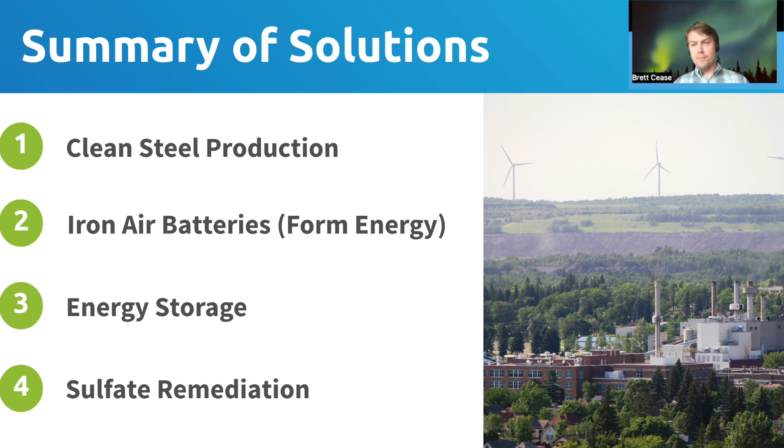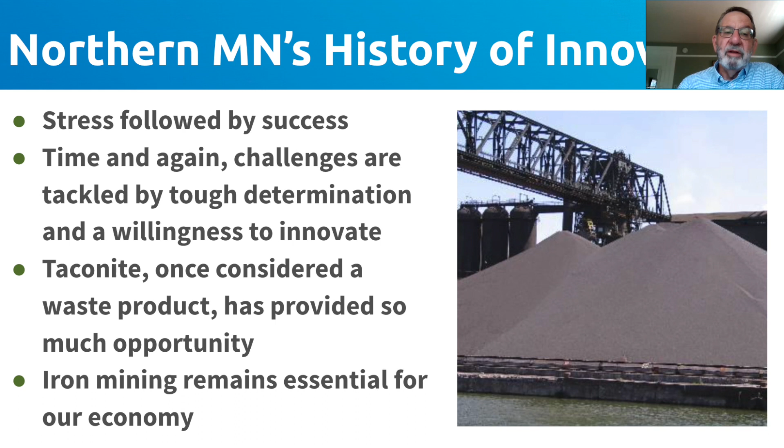The history of northern Minnesota is often told as a story of boom followed by bust. But perhaps a better description is stress followed by success. In particular, mining on the Iron Range is a story of stressful turning points, followed by successful adaptation. Challenges were tackled with tough determination and a willingness to innovate. By the end of World War II, high-grade iron ore was becoming harder to find. At that time, taconite was considered waste, at least until E.W. Davis figured out a way to concentrate and pelletize it. The rest is history. The iron mining and steel industry, so important to our regional economy, now face another turning point: the drive to decarbonize the iron to steelmaking process in response to climate change.

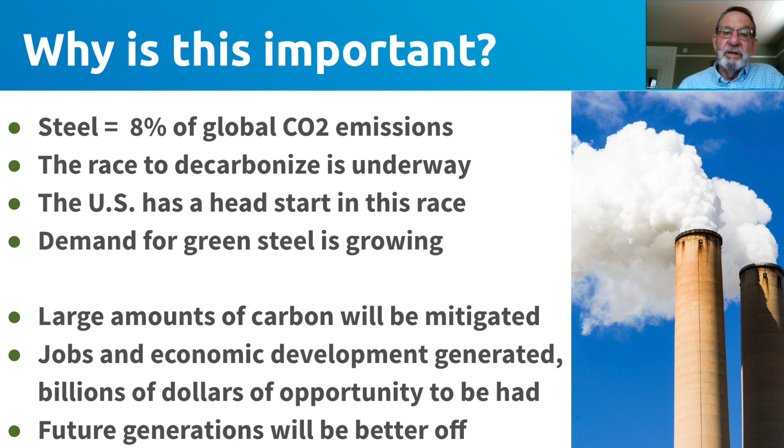Steelmaking accounts for approximately 8% of worldwide carbon emissions. Mitigating these emissions would be a very significant step in combating climate change. Moreover, the necessary transition away from fossil fuels to a clean energy economy will require more, not less steel. But what kind of steel? Major steel users, the auto industry for one, are asking for low carbon intensity steel. In other words, green steel.

The transition to green steel and a clean energy economy provides not only challenges, but great opportunities as well. In this transition, trillions of dollars will be invested and millions of good jobs created. This can be a win-win-win: lower carbon emissions, economic and job growth, and preserving our northern Minnesota way of life for our children and grandchildren.

The question is, so why not here in northern Minnesota? How can we take advantage of our many assets? Access to natural resources, a skilled workforce, available renewable energy, and strategic positions on the electric transmission and transportation grids. More specifically, what are the ingredients necessary for our region to be a player in the making of green steel?

First, to make green steel, we need to find innovative ways to decarbonize ore processing and steelmaking. Second, we need access to clean, renewable energy: wind, solar, hydro, and hydrogen. Third, we need electric transmission capacity to get the power where it is needed and means of storing power, such as batteries and pumped hydro. Fourth, we need innovative technologies to address problematic byproducts of mining, in particular, ways to mitigate sulfate discharge. For the remainder of this video, let's take a closer look at each of these ingredients.

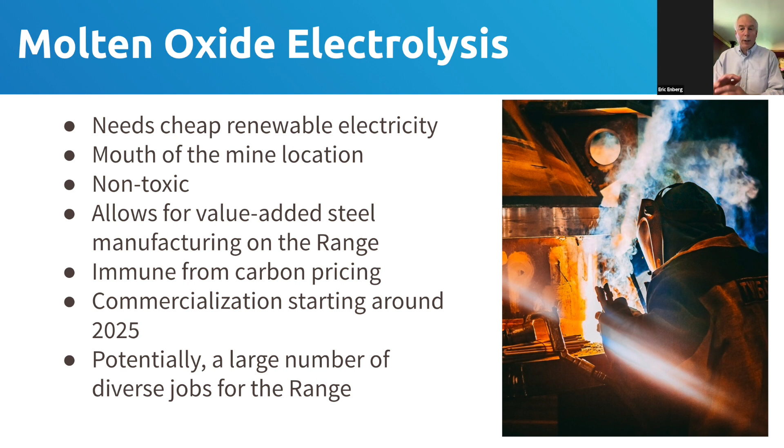That's what makes rust, or iron ore. It needs a lot of cheap renewable electricity. Because it is very modular, it is something that can be done at the mouth of the mine, and it is a non-toxic process—the only thing that comes out of it is oxygen. It allows for value-added steel manufacturing on the Iron Range, and because it can only operate with cheap renewable electricity, it's really immune from carbon pricing. Commercialization of this process is expected around 2025, and potentially a large number of diverse jobs could be coming to the Iron Range, as you're able to produce iron, and if you mix a little bit of carbon into it, you can make steel, which can be used for all kinds of manufacturing jobs on the Iron Range.

Next is low temperature iron. This process uses an acid to liberate the iron from the ore, and then you run electric current through it, and it electroplates the iron out. This then feeds an electric arc furnace, which is how most steel is actually produced in this country using scrap steel, but this source of iron would be ideal for it. Interestingly, you also get other minerals out of this process, such as copper, aluminum, manganese, and silicon. The pilot for this project is expected to be done in Pueblo, Colorado.

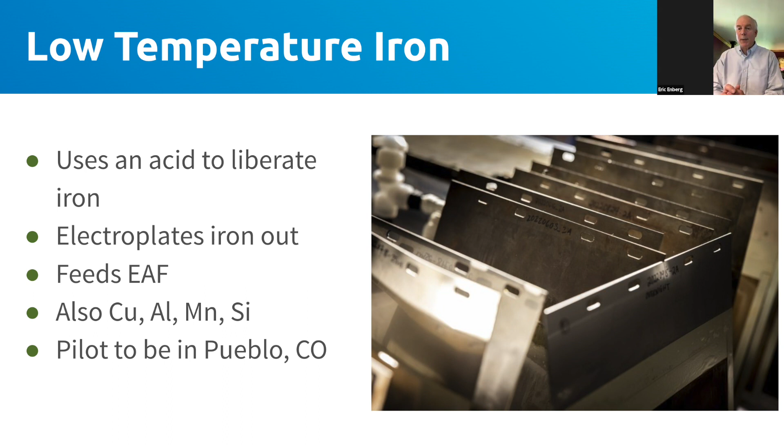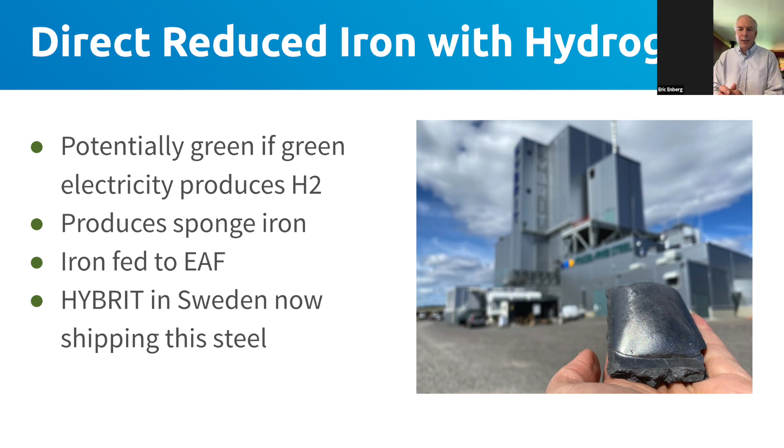Direct reduced iron with hydrogen—this is probably the process that is furthest along. The idea is that green renewable energy would be used to produce hydrogen, and the hydrogen is used to produce the high heat necessary to dissociate the iron from the oxygen and produce iron. This produces sponge iron, which can also be fed into an electric arc furnace. You get the sense that electric arc furnaces have these cosmopolitan tastes when it comes to iron. The HYBRIT system in Sweden is now shipping this steel, so this is actually a commercially viable process.

Thermochemical reduction and oxidation—that's a mouthful of a label for a process that is actually kind of complex. But to boil it down, it uses perovskite crystals to steal oxygen off of carbon dioxide, creating carbon monoxide in the process inside a blast furnace. That carbon monoxide then goes back to the ore and steals another oxygen off of it, creating pure iron. It's half the cost of using coking coal, and you get a 90% carbon dioxide reduction. This one, however, is probably the furthest from commercialization of the things we looked at—it's still on the lab bench. There are a couple of issues they have to resolve.

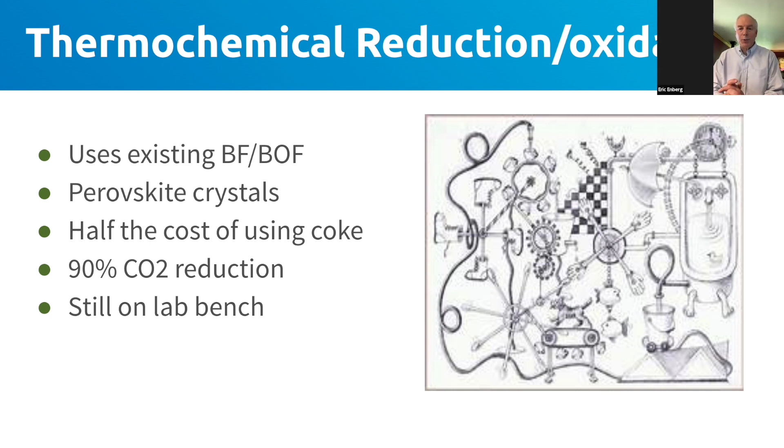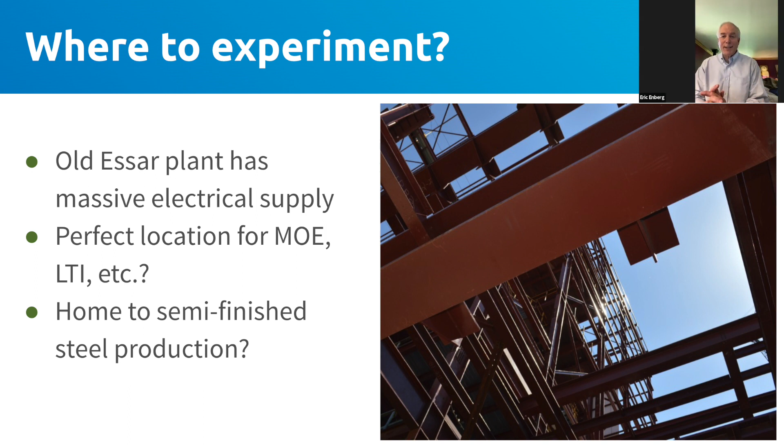So where to experiment? Well, the old Essar plant has a massive electrical supply already attached to it, and it would be a perfect location to do things like molten oxide electrolysis, low temperature iron, etc., and possibly could be home to semi-finished steel production. That's it for me. There's some very exciting things going on out there, and we can all look forward to it. Thank you.

I'm Mike Overend, and I want to talk to you about a new technology that's an important clean energy solution which will change our world. This is the opportunity presented by the Form Energy Iron Air Battery. Manufacturing this battery in Northeast Minnesota is a unique opportunity, offering permanent, strong job growth for iron mining and sustainable, environmentally friendly manufacturing jobs for range communities. These batteries are a critically important climate solution that lower costs for clean energy, and importantly, this technology does not require controversial metal resources or unreliable supply chains.

Our global energy system has a major problem. Burning fossil fuels causes major economic damage and inflation while it destroys our environment and our health. In 2022, over 60% of our global electricity came from burning dirty and expensive fossil fuels, creating a huge source of pollution, waste, and extra expense. These are also a major source of greenhouse gas emissions, which cause severe losses from floods, droughts, fires, disease, famine, and wars. The air pollution from burning fossil fuels like coal and diesel is responsible for about 1 in 5 premature deaths worldwide from chronic respiratory and heart disease, according to Harvard School of Public Health.

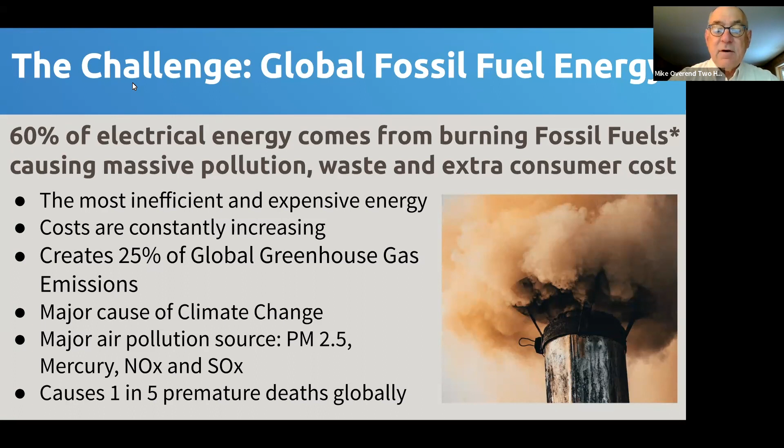The solution is moving to 100% clean, cheap, renewable energy to power all our needs with clean electricity. This is called beneficial electrification, and it eliminates up to 80% of all greenhouse gas emissions. Unfortunately, the sun doesn't always shine and the wind doesn't always blow. Wind and solar are intermittent energy sources, and current utility batteries only last for 4 hours.

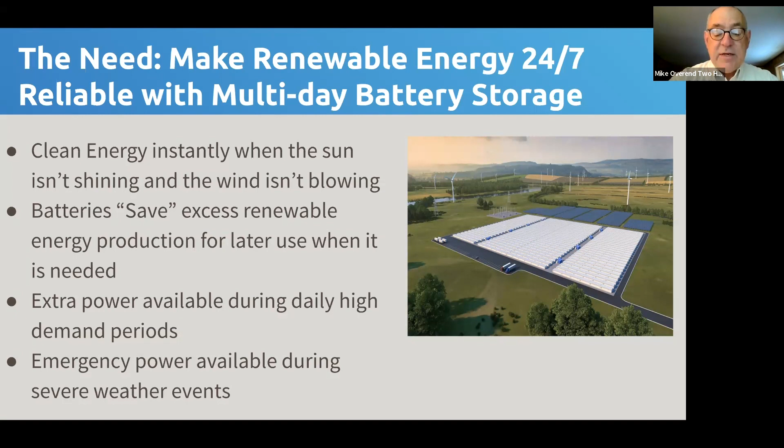For 24/7 reliability of renewable energy, we need a utility scale battery that lasts for multiple days. Form Energy saw this need and created a cost-effective, clean, and scalable solution. Their iron air battery instantly provides up to 100 hours of continuous power, which utilities can use for both routine and emergency energy storage needs.

Form Energy's iron air battery is unique for storing excess wind and solar energy, making it 24/7 reliable. It uses Minnesota's abundant, affordable iron products, with a safe, non-flammable design and recyclable, non-toxic components. It's flexible and modular to meet the energy storage needs of any major utility.

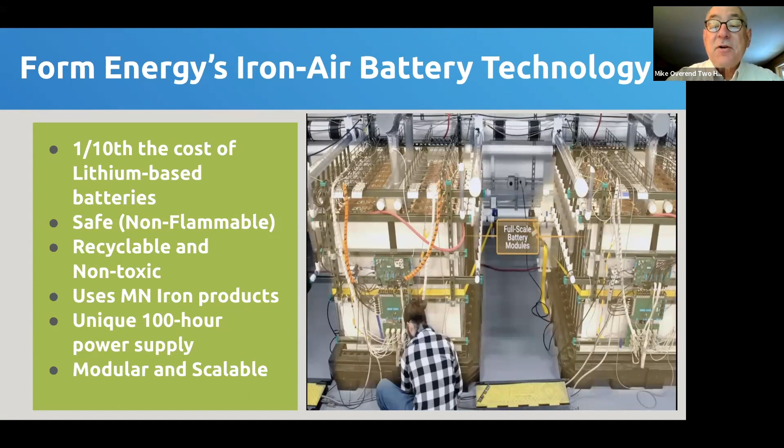The iron air battery uses the common chemical reaction of rusting of iron-based metal using water and oxygen from the air to instantly release stored electricity for up to 100 hours at 1/10 the cost of current lithium-based storage batteries, and the only byproduct is oxygen.

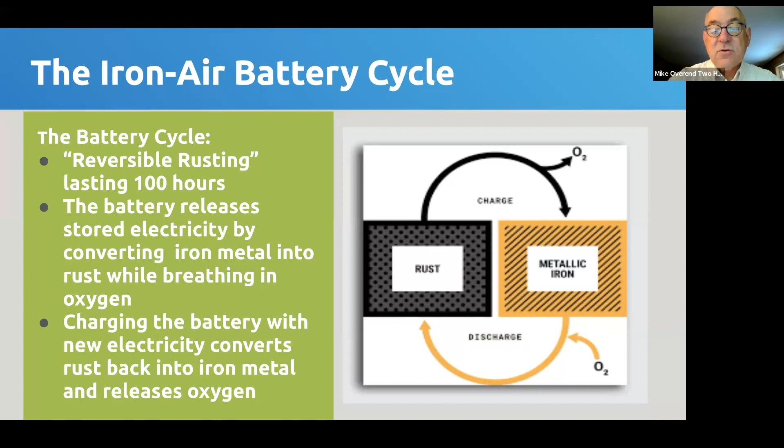Northeast Minnesota has the unique resources which are perfect for Form Energy to manufacture iron air batteries here. We have skilled labor, iron ore, and the potential for DRI pellet production. We have advanced electric grid and transportation infrastructure. Northeast Minnesota is a perfect home to manufacture Form batteries.

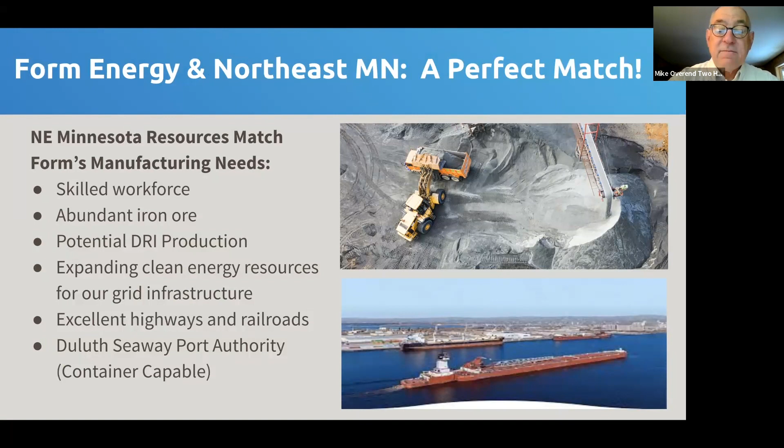Form Energy is building their first manufacturing facility in Weirton, West Virginia, creating 750 new jobs with a $760 million investment. The US is expected to install 75 gigawatts of battery storage by 2027. That's the equivalent of 75 large coal-fired power plants. Form will need to make additional manufacturing facilities happen to meet this demand.

Manufacturing of Form's iron air battery is a unique opportunity for Northeast Minnesota, offering sustainable iron mining jobs, good construction jobs, sustainable battery manufacturing jobs, and it makes green steel and other clean energy manufacturing in Minnesota possible as well.

Our communities and leaders need to help recruit Form Energy manufacturing to Northeast Minnesota. These are mining jobs for people and the environment, which will sustain and unite our range communities.

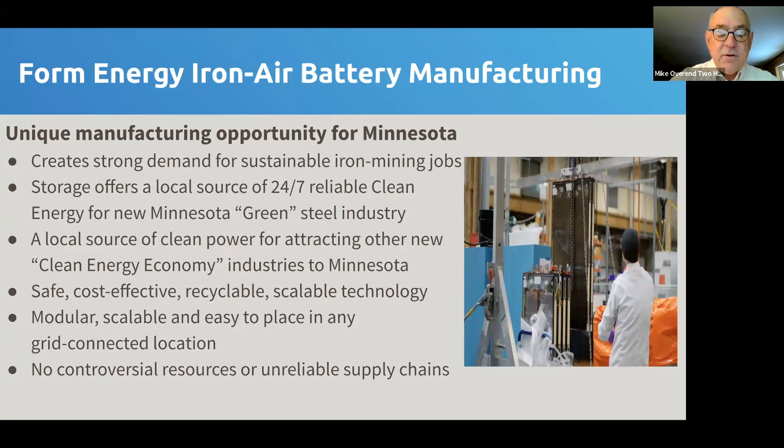Thank you. Hello, my name is Russ Mattson, and today I want to talk about the opportunities for the production, storage, and utilization of green renewable energy in northeastern Minnesota.

The driving force behind this opportunity is the growth in renewables, solar, and wind. Recent data from the Energy Information Administration shows that intermittent wind and solar energy production amounted to almost 14% of energy production. Projections by NREL and others indicate wind and solar will double by 2030, reaching almost 1/3 of the United States energy supply needs.

Because of the intermittent nature of renewables, energy storage is an absolute necessity. Storage will be necessary for load shifting, voltage control, frequency control, peak shaving, deferral of distribution or transmission projects, curtailment which would occur otherwise and seriously impact solar and wind production, as well as other functions.

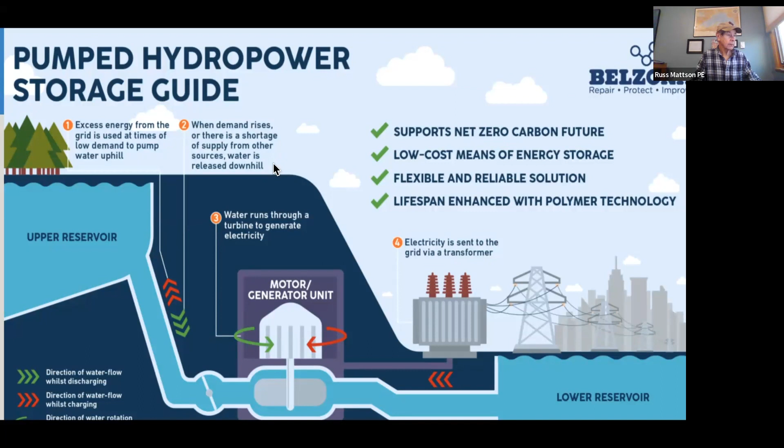There have been recent studies done by the University of Minnesota via the NRRI looking at the feasibility of pumped hydro in northeastern Minnesota at abandoned mine sites. 9 such sites have been identified for further study.

There are other energy storage technologies that have been studied by the University of Minnesota. One such technology is compressed air energy storage. Air is compressed and stored underground and returned to the surface when needed to drive a turbine. There are 2 large such facilities in the United States today, one in California and the other in Alabama.

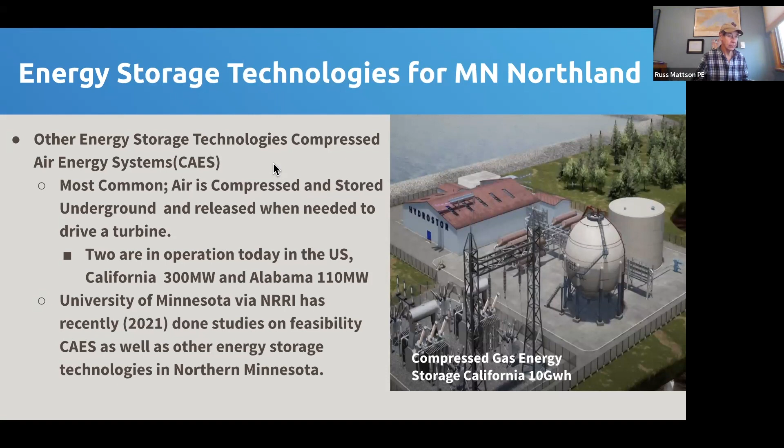There are other storage technologies as well that are suitable in the northeast of Minnesota. I won't go into them in detail, but they include gravity storage, where weights are simply lifted to height above grade and released, driving a turbine when needed.

Northeastern Minnesota is in a very unique position. All the pieces are in place to utilize and store green renewable energy. We have the transmission infrastructure. We have two 500 kV lines with quite a bit of capacity.

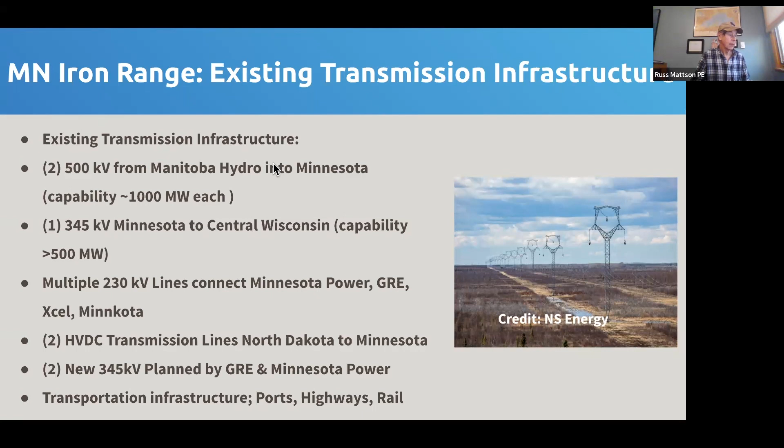We have an existing 345 line into central Wisconsin, and multiple 230 kV lines, and HVDC transmission service goes to all the mines today in Minnesota. We have the geology, abandoned mine sites, and water for closed loop or open loop pumped hydro. In addition to the transmission structure and the geology, we have the transportation infrastructure, ports, highways, and rail from legacy industries. And if that wasn't enough, we also have more green potential. Manitoba Hydro indicates they have the potential of an additional 4,300 megawatts of hydro at existing facilities. Thank you very much.

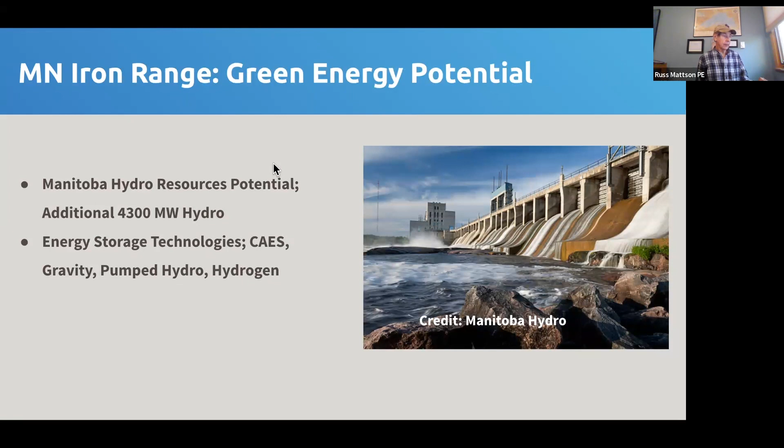Hello, I'm Jeff Hanson from Clearwater BioLogic in Babbitt, Minnesota.

In Minnesota, we do have sulfate standards because sulfate does impact wild rice and the health of our water systems. This sulfate often comes from mining features from taconite mining. In the 2018 Tribal Wild Rice Task Force report, they identified, using MPCA and DNR data, the point sources of sulfate on the Mesabi Iron Range. The larger yellow dots show higher concentrations of sulfate in the streams.

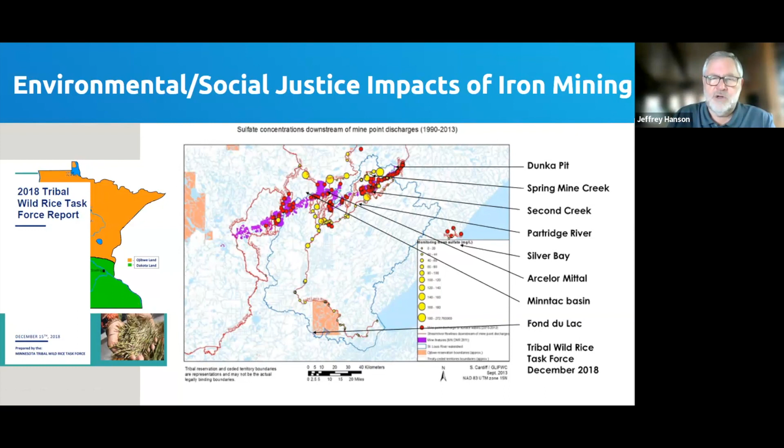The blue line is the St. Louis River watershed. We can see that many of these point sources feed into the St. Louis River. As it goes downstream, it gets more diluted, and there is a natural attenuation of sulfate as it goes. This natural attenuation has sulfate that permeates into the anoxic soil where there's no oxygen.

So the sulfate reducing bacteria there effectively steal the oxygen to breathe and decompose the organic matter, releasing nitrogen, phosphorus, and mercury. In that process, they also methylate the mercury, which is then soluble in water and gets into our fish in the food chain. That sulfate is effectively converted by sulfate reducing bacteria into hydrogen sulfide.

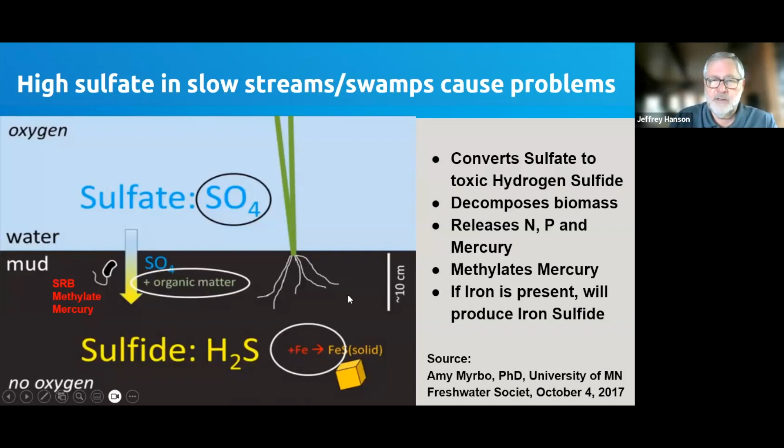Hydrogen sulfide is that toxic, rotten egg smell that none of us like, and that does damage the wild rice. If there is the right kind of iron available, that hydrogen sulfide will react with the iron to make an insoluble iron sulfide. The Clearwater BioLogic system mimics what nature does there.

We have floating bioreactors that operate under the surface of the water where it does not freeze in the wintertime. We provide food for the sulfate-reducing bacteria to effectively convert sulfate to sulfide in step one. In step two, we provide iron to make iron sulfide, which can then be precipitated out and removed from the system, effectively removing the sulfur from the whole system.

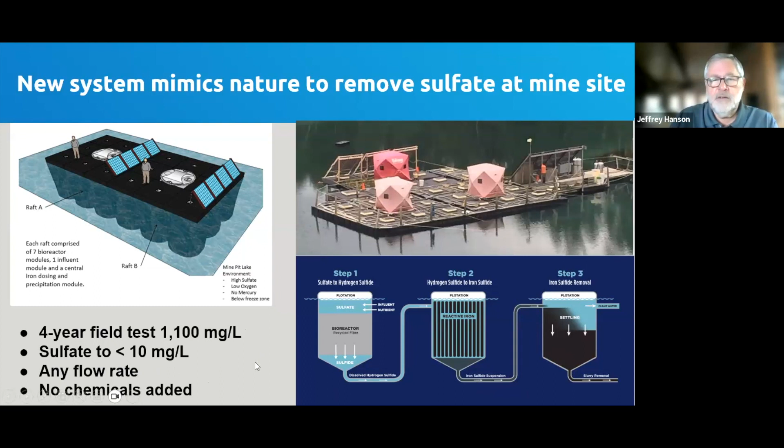In four years of a field test in a mine pit lake shown in the picture, we effectively reduced 1,100 milligrams per liter of sulfate to less than 10, which is the wild rice standard. It can handle any flow because it's modular - add more modules and do that. There are no chemicals added to contaminate the water.

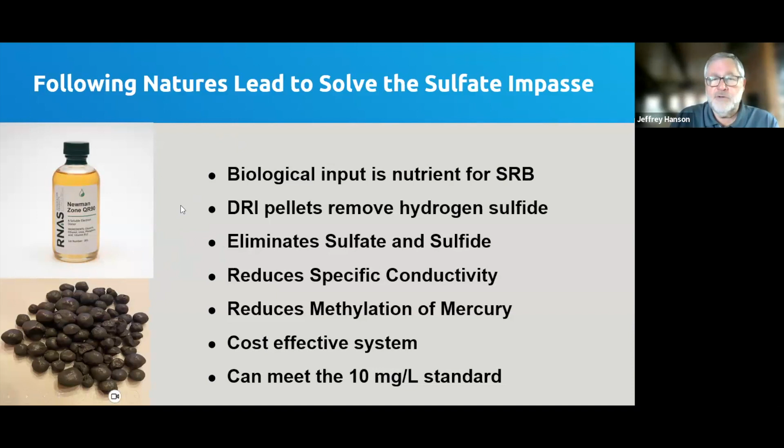Following nature's lead, we are solving the sulfate problem. Biological input is just a nutrient to feed the sulfate reducing bacteria, as shown in the jar. Then we add DRI pellets, or direct reduced iron pellets, which is the right form of iron, to remove the hydrogen sulfide, reacting and making iron sulfide. This eliminates the sulfate and the sulfide, removes the possibility of damaging the wild rice, and meets the standard.

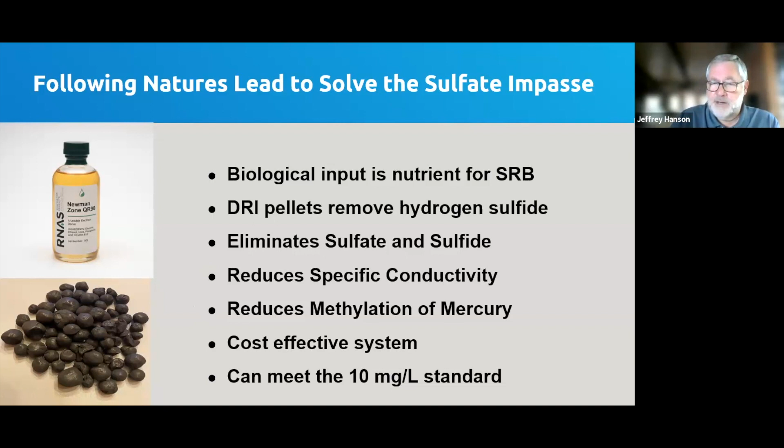It also reduces the specific conductivity of the water, which is an advantage. And a big advantage, it reduces the methylation of mercury downstream. This is a cost-effective system. Why hasn't the industry adopted sulfate standards before? Their defense is it's too expensive. This system is not too expensive. It can meet the 10 milligram per liter standard for wild rice in an effective way.

Thank you. You've made it this far.